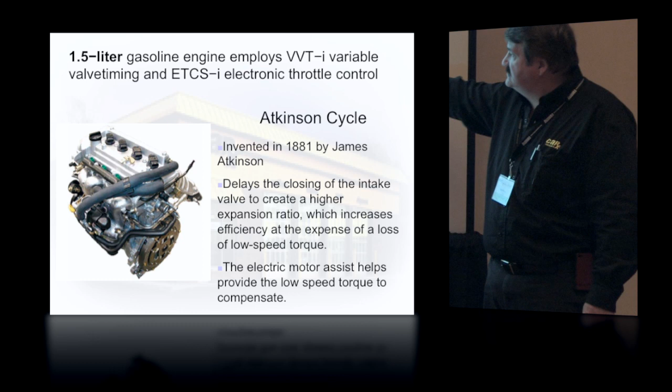The trouble is, because of delaying this intake valve to create a higher expansion ratio, it increases efficiency at the expense of power. So as an efficient engine, it didn't make any power. Well, back when he did that, we didn't have the electronic technology we have now. There was no way to take advantage of it.

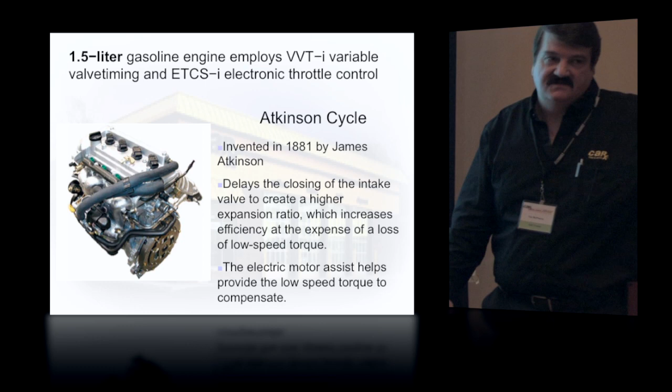So here we use that style motor that's very efficient with an electric motor to help compensate for the loss of power. Or in Ford's case, we turbocharge it. The EcoBoost, that's an Atkinson cycle engine with a couple turbos on it. So here we pair it up with an electric motor so that it can have the power that we Americans demand out of our cars.

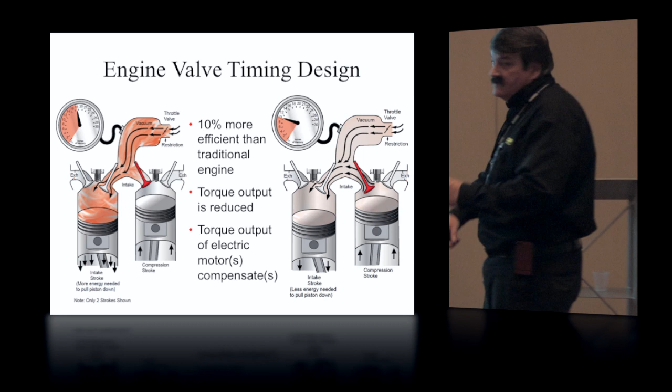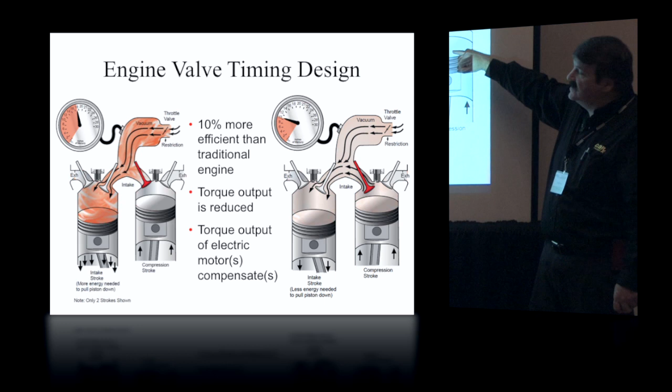There's your conventional engine. See the 18 inches of vacuum, normal. On the Atkinson cycle, we have a lot less intake vacuum because they leave an intake valve open. So as this piston comes up on the compression stroke, it's helping push air into the other cylinder to help with pumping losses. But by doing that, we also get a loss of power out of this cylinder because our compression event is not near as long. So even though it's efficient, it doesn't make a lot of power.

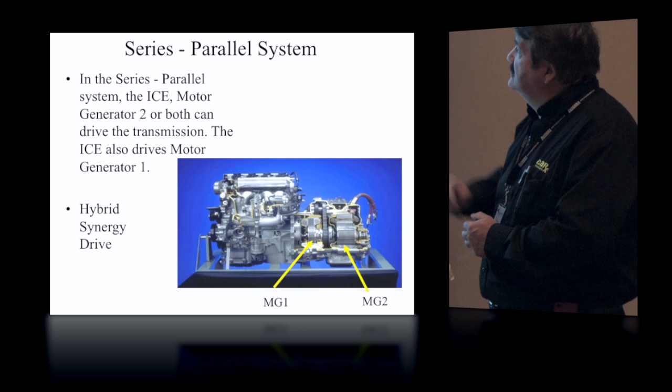Series parallel system is your typical Prius. The motor generator 2 can drive the transmission by itself or add the internal combustion in. Motor generator 1 is the generator to charge up the batteries.

Notice the size difference between the two of them. That's your hybrid synergy drive that Toyota has. Now, I won't spend a lot of time on this, but this is how they put it together. Planetary gear set in the middle. Gas engine connected to the carrier. The electric motor is connected to the ring gear. And the generator is connected to the sun gear.

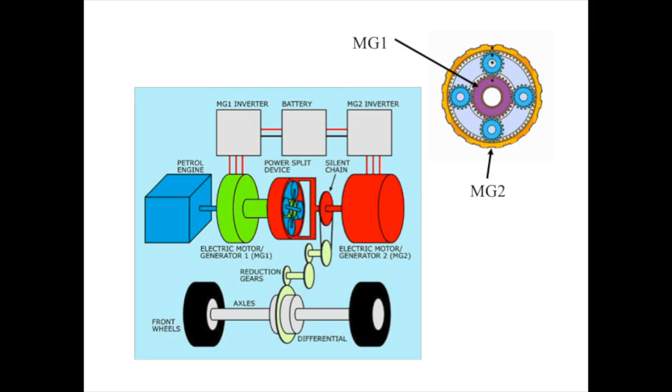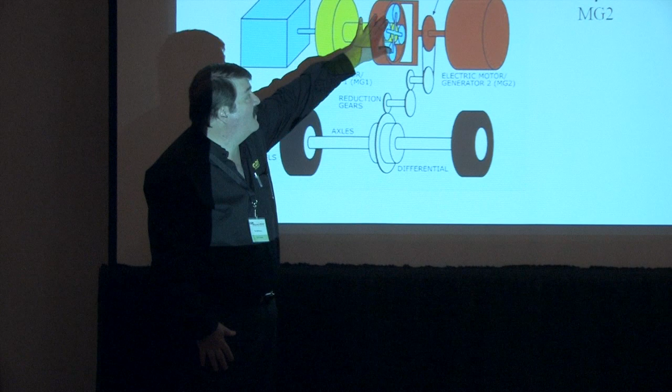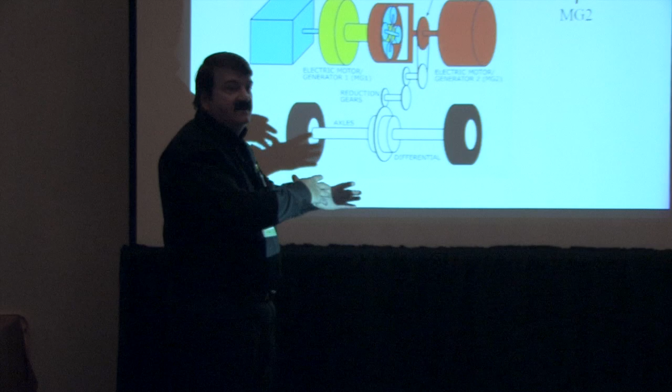So if we have the gas engine running at 5,000 RPM and we got this running at 3,000 RPM, the computer controls the generator to control the gear ratio given out by the planetary gear set, which then goes into the transaxle. So there are infinite combinations of how the computer can splice the gas engine and electric engine together, or shut one off or the other. It's in complete control of that thing.

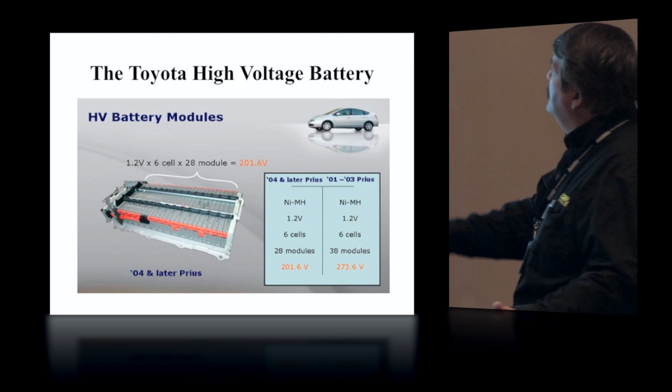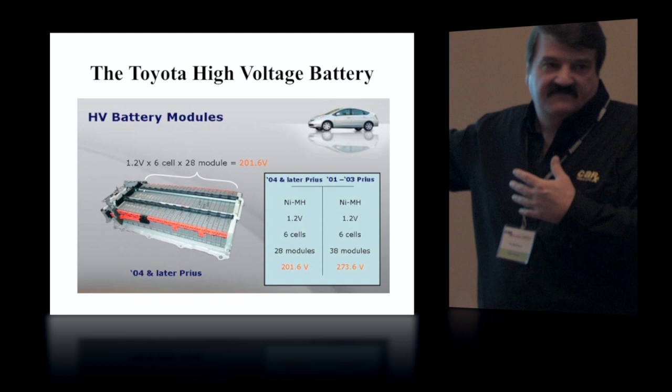Now the battery packs, we don't spend a lot of time on this, just showing some of the different ones. With the Prius originally, people were always worried about the price of a battery pack. Well, you could replace individual cells. So instead of $5,000, they were like $360 a piece if you only had one or two cells that failed.

A lot of the other ones, now here's the little battery that's underneath the seat. A couple little things technology-wise: absorbed glass mat, and it's a lead calcium battery. So that it doesn't give off a lot of hydrogen gas inside the car, which would be bad because it's in the passenger compartment. And very low amperage, 3.5 amps.

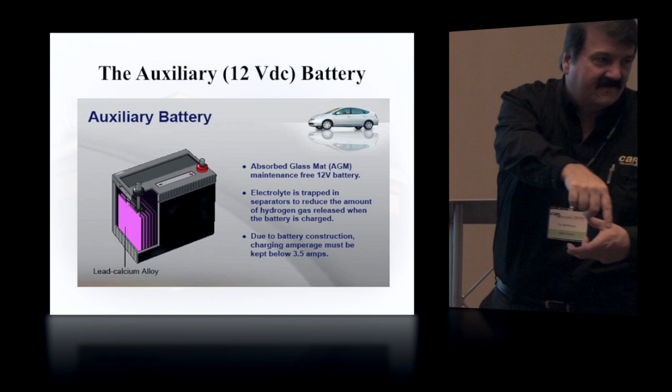You cannot put this on a battery charger. A lot of guys say what they do, instead of buying expensive chargers, is take their jump pack and hook the jump pack to it, then plug the jump pack into the wall. So the charger for the jump pack is actually charging that battery. And all it needs to do is turn on the electronics, make everybody wake up, and then the big batteries in the back do everything else. So this is really not a battery in the terms we normally think of them.

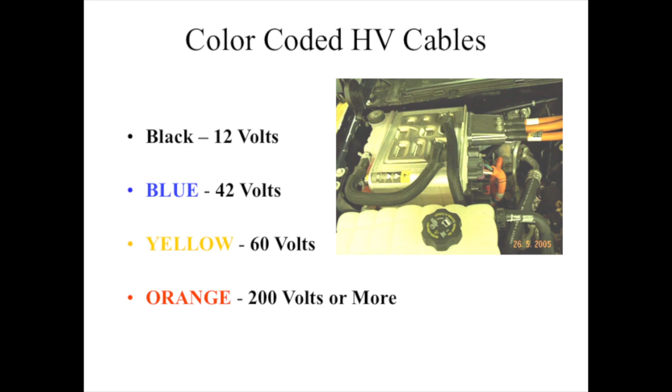Yellow, they're saying is 60 volts, which I'm not quite sure what we'll see that on, because yellow I always thought was airbag wiring. Remember, the airbag is always in yellow. And then blue is a new one, 42 volts. On the mild hybrids, those cables that run the 42 volts should be wrapped in blue shrinky-dink wrap running around there, so you know that that's a little bit higher. 42 volts isn't always enough to shock a human. It depends on your internal resistance, but you don't want to try. I don't want to find out.

Safety equipment. We got some of that over here, pass it around. Safety glasses, I'm sure you guys have seen before.

These gloves are a little bit new. These are the Class O gloves for insulation when working with high voltage. Then you put a leather glove over the top of that to protect it, because you don't want to poke a hole in that insulation glove with something you're working on. So the leather glove protects that insulation glove. And periodically, you want to check them for leaks.

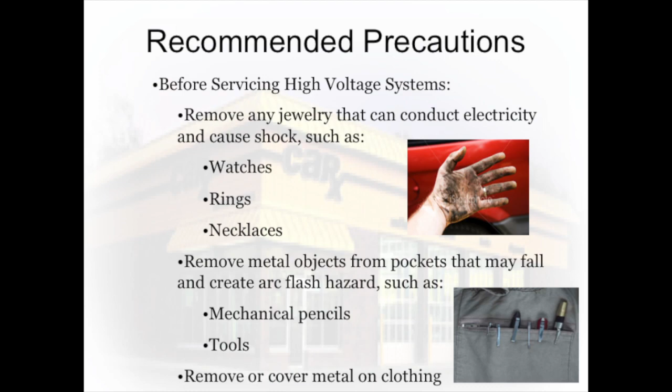Let's back up to this one here. Don't start working on these things with dirty hands. No, this is not a burned hand, it's a dirty hand. But there's a ring on here, and I know everybody in here has had some technician that's grounded his ring out against a starter.

So you don't want to do that with 300, 400 volts. Items in your pocket could fall down and get into these things. It's not like it's going to drop onto a battery and short out, but say you dropped a pocket screwdriver down beside there and then you're trying to wiggle the battery pack and set it back down on top of it and it pokes a hole. These things could happen, so you want to use some caution. I don't know about guys with piercings, that could come into that too.

The Class O and the leather gloves, side shields on your eyeglasses. Periodically, they suggest that you blow them up to look for leaks. You can blow it up, stick it in the water, and see if any bubbles. Any leaks, they gotta go.

Some of these have expiration dates on them too. I know some of the initial ones, which were like 6 months, you had to throw away. But they have better ones out now. Toyota has a pair they guarantee for 6 years. So it just depends on what you're buying. They're not terribly expensive, but you'd want good quality equipment.

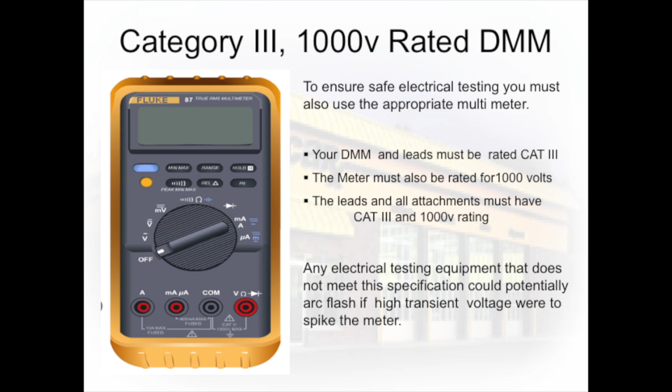Meters. You need a Category 3 meter. Now, of course, Fluke is going to be one of those that's rated for Cat 3, 1,000 volts. But how many of our guys have got the Harbor Freight $8 meter in their box? That would be a no-no.

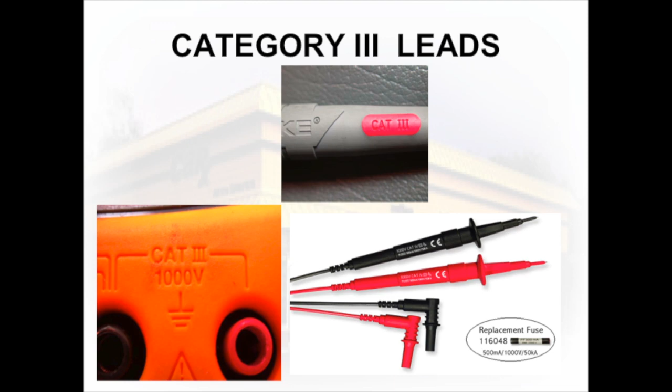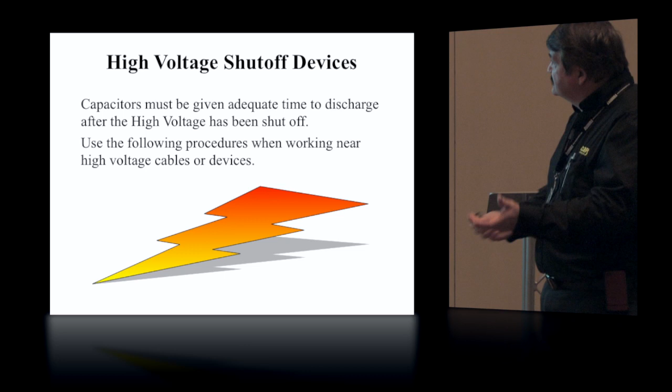High voltage shut-off devices. Capacitors have to be given time to discharge, because they're always there to store some electricity. You sure don't want to short out a capacitor.

We're showing some of the ways some of these cars get shut off. The Prius, second generation, down the back of the trunk, it's real hard to get to back there. And they always recommend using rubber gloves to turn these things off, because you never know if there's some kind of a fault in the system.

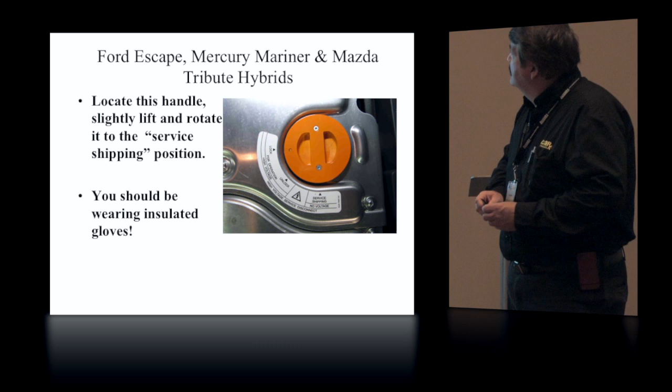Okay, this is the Escape, and the Mariner. It's in the trunk in the back.

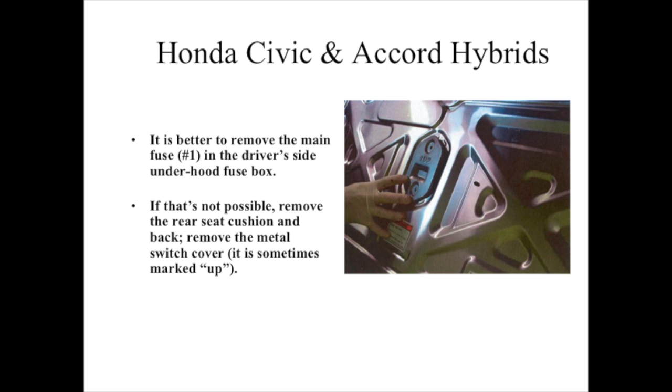Behind the back seat on the Civic and Accord hybrids. I've got one down in St. Louis, the guy's working on right now with a cracked head on it. He wanted to make sure he disabled that before he got into the system.

The green key that GM uses to shut their system. Now it's only a 42 volt system, but notice it does have a master shutoff key on it.

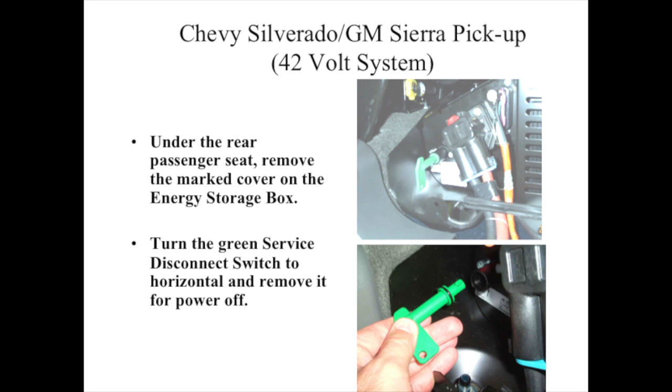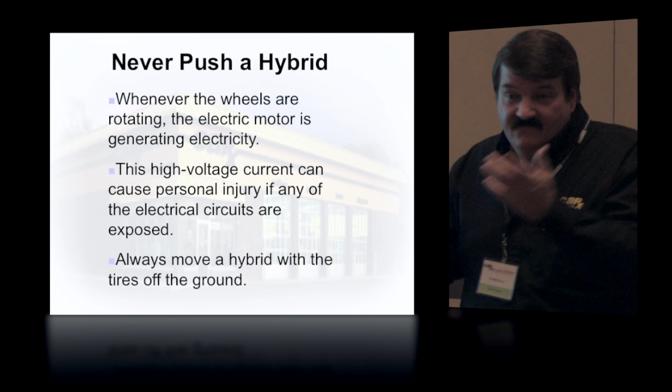Never push a hybrid. What do you think? That generator in there, if you start spinning it, it starts generating electricity. So I think most of the recovery drivers know they put these hybrids on a rollback. I hope none of them would tow them on the ground. But if it's at your shop and it's outside, you need to push it inside, and you should still be able to do that just fine.

The caution they're saying now is put somebody in the driver's seat, just in case that when you push it, it decides to start on its own. So put somebody in the driver's seat when you're going to push it into your shop.

Okay, so maintaining and servicing. This one here, the reason they put this in is because so many of our guys are good at kicking the rack underneath to raise the car, but these guys are a little different. If somebody had gotten those orange cables out of their holder and one is hanging down, and you pinch that when lifting, that's going to be a real pretty show with sparks flying everywhere. So yeah, that would be a bad thing. Tell them to use a little caution on that kind of thing.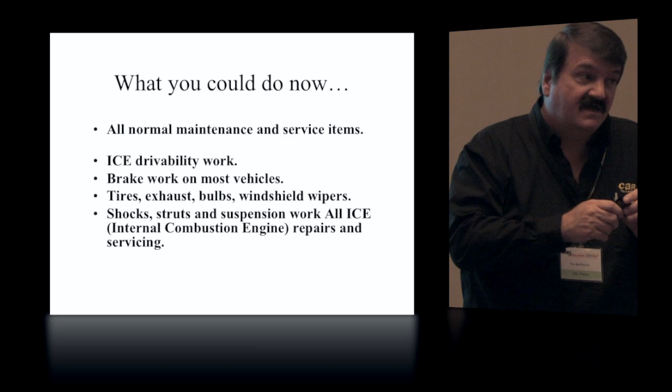With the first generation Prius, I was at a Toyota school, and the Toyota scanner would not start that gas engine. The only way you could start it was to turn the AC on max AC, and then it would start the gas engine to run the compressor. I had no command to force that thing to start. Now they've fixed that since then, but it depends - which version of Genisys do you have? 4.0, 5, what do you have? That could affect that.

But the brake work, most of the tires, exhaust, bulbs, windshield, that stuff's all still the same. Although a little funny note I saw on the exhaust was that nobody is making an aftermarket converter for the first generation Prius, and they're coming up on 10 years old now. Right now there's no aftermarket for that. So I'm like, that's not good.

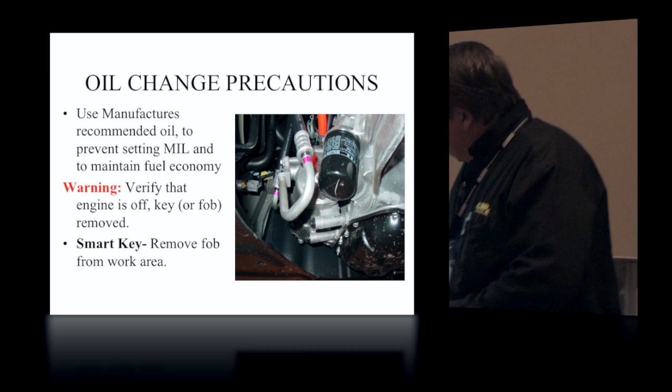Oil change precautions. This is one place where we really can't shortcut what the manufacturers say, because these engines aren't like a regular engine - we don't know when they run, how often, how long, or what kind of load is on them. So you need to stay with what the manufacturers recommend.

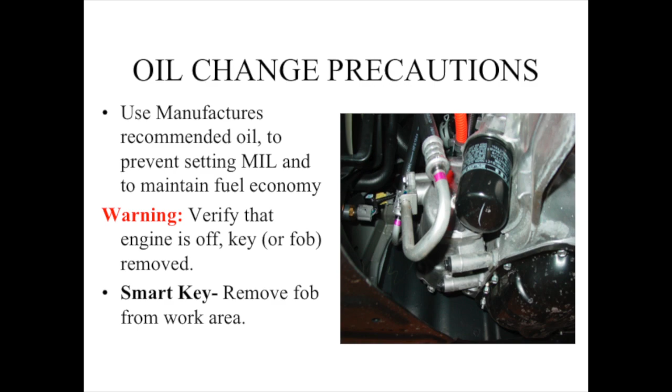This one here is a neat little thing, and it applies to some other cars besides the hybrids. Smart keys - getting them away from the car. Some guys are taking them out and putting them on the service manager's desk. They make a little box, like a kryptonite box. You put the key inside, put the top on it, and it keeps the key from communicating with the car to make sure it doesn't start while you've got the oil drained out of it. Also, if you're looking for a drain on the system, you can't get the computers to go to sleep with those keys anywhere near the car. So that's something kind of new you might want to look into.

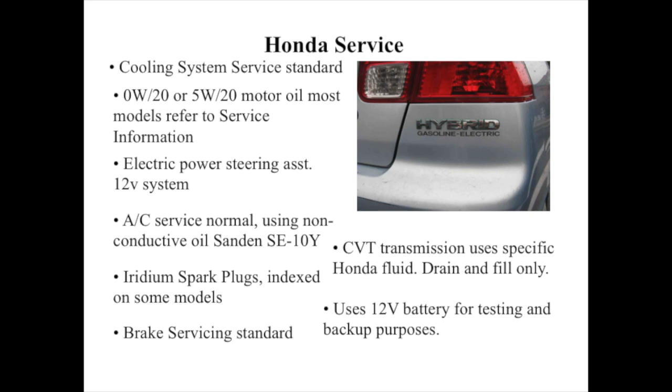Honda service, pretty straightforward - cooling system, electric power assist. Putting the right weight motor oil is essential in these things. Now, I've not heard any good answers about what mileage you should put on that sticker on the windshield. You shouldn't be putting 3,000 on a hybrid engine, but what do you put? Because you don't know how often the engine runs. So that comes to be a little bit of an issue.

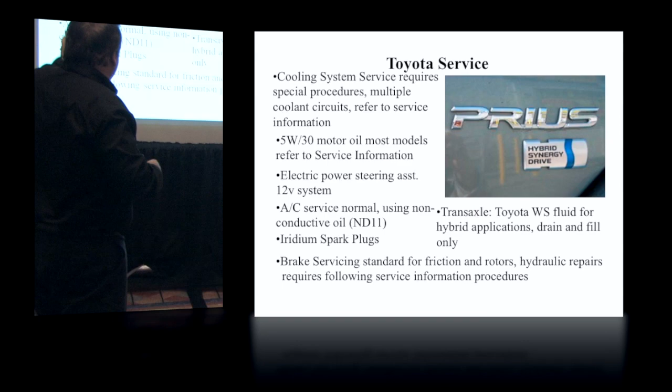The Prius cooling system service - remember, here you got one car with two cooling systems. Sounds good to me, I got one car in shop, I get two drain fills: one for the engine, one for the inverter. There's two completely separate cooling systems, two radiators in that thing. And then everything else is pretty well standard. A lot of these cars will use a CVT transmission of some kind.

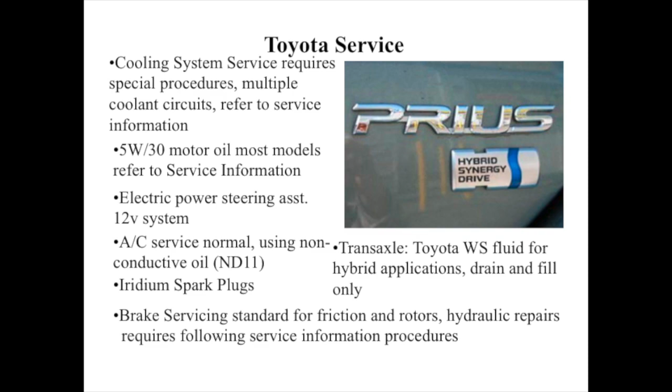This is new - AC service, you have to use a non-conductive oil, not your plain old PAG. You've got to use a non-conductive oil on these compressors because of the high voltage inside them. So that's something to bear in mind.

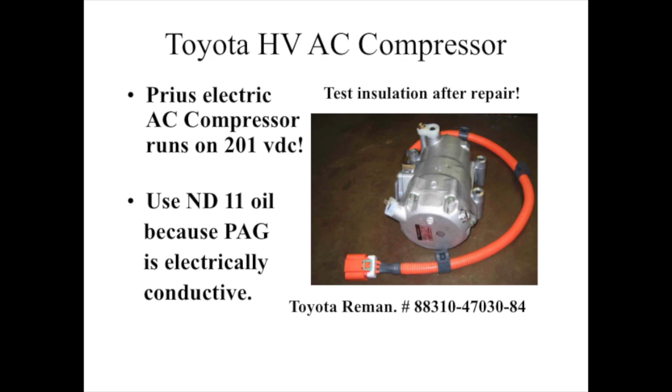They make this little guy - this is an insulation tester. It tests either 250, 500, or 1,000 volts. So you take the harness, hook this end to end, hit the button, and it sends high voltage through it and checks the insulation to see if it's still valid to withstand the higher voltages.